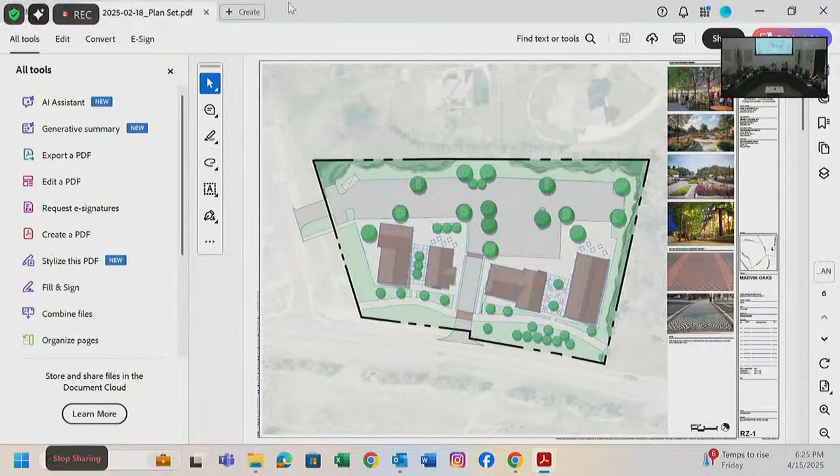Go down. Let's go one more. Stop right there.

The surrounding land use and existing zoning include: to the north, residential and common open space for the Preserve at Marvin. To the south is Civic and Village Hall. To the east is residential, zoned R40 Union County, the Gates at Ansley. To the west is also residential/common open space for the Preserve at Marvin.

The site currently consists of approximately 2.939 acres with an existing single-family home and detached accessory structure. The applicant is proposing to demolish the existing structures on the property and construct 4 new commercial buildings totaling 30,000 square feet of commercial retail space.

The proposed development will be phased, with buildings 1 and 2, the two buildings on the left closest to Village Hall, being constructed first, and buildings 3 and 4 built during phase 2. It's anticipated the development will not exceed 7 years to be fully built out.

The total building sizes: on the left is 8,000 square feet. Buildings 1, 2, and 3 are 2 stories. Building 1 has a 4,000 square foot footprint, 2 stories, totaling 8,000 square feet.

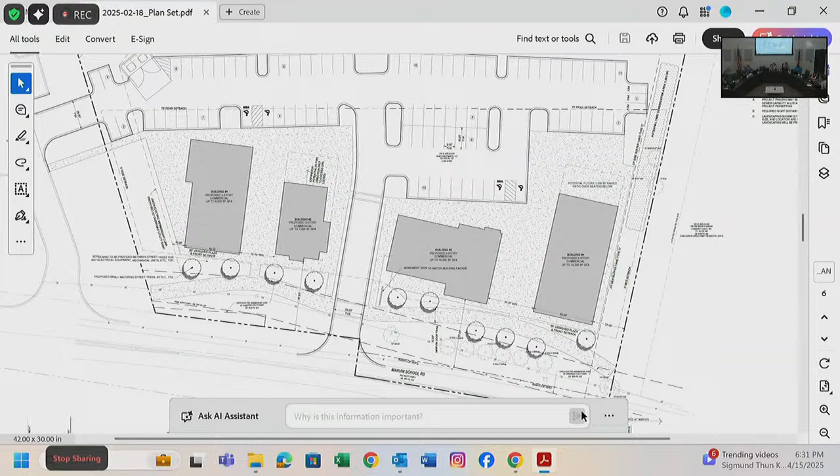This is once again a portion of the Marvin Loop, which the village has received funding for and is currently going through the engineering process for that project. So the applicant, if approved, has the option to either construct that portion of the trail per the approved Marvin Loop plans that get approved by NCDOT for construction, and or pay a fee in lieu for the portion of the material, the linear footage of the asphalt.

And the location of that is approximate. Once again, the applicant is working with Dewberry, the contracted engineer with the village for the Marvin Loop project, to get the alignment surveyed and straight, basically set in stone based off of what Dewberry is doing for the overall loop extension plans. Any questions on that? Does that make sense?

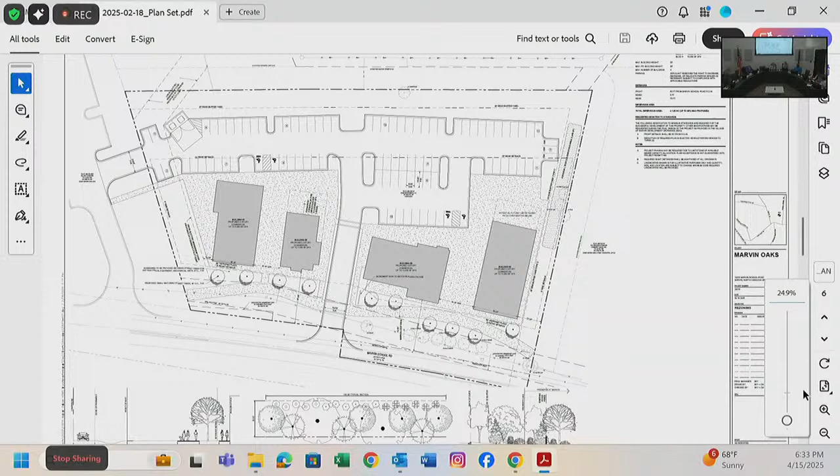Parking, once again, the Heritage District, as we have discussed in previous rezonings as well as with this one, there are no minimum parking requirements. That's how the district was set up. The development is proposing 92 parking spots, including 4 ADA and 3 electric charging station spots. That 3 is a deviation requested. The MDO, when we adopted it, required 1 PEV charging station for every 10 parking spots. So that is something that can be discussed. It was recommended to be 3, just so there is still available parking for the rest of the development, as well as it being the first development under the MDO with that new requirement.

The site also connects with Village Hall, which, depending on approval and the uses, would have different times of use. Village Hall has approximately 30 parking spots, so it's ultimately supposed to be shared parking, walkable and shared throughout the district. That does open up additional parking opportunity depending on off hours from Village Hall, as well as when no meetings or anything are going on here.

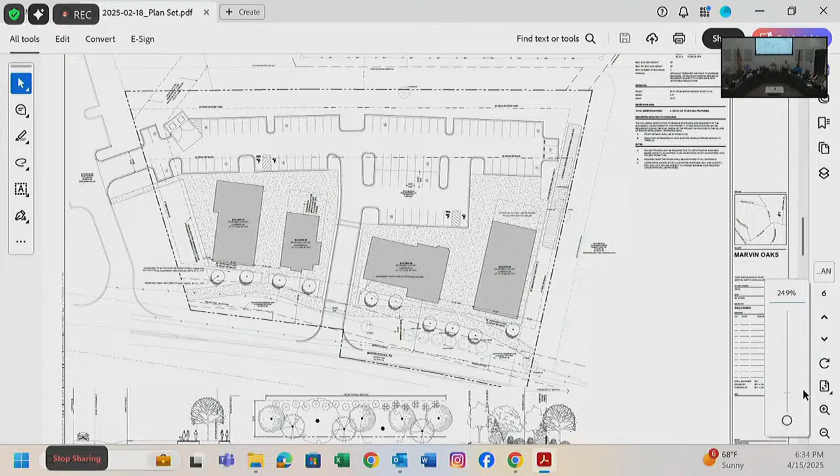Regarding utility with water and sewer, water is accessible from the front of the property. There's existing water along Marvin School Road. There is an existing platted easement at the rear of the property for sewer, so the applicant would have to extend the sewer to the back of his property line. All those plans would have to be reviewed and approved with Union County Water, but this is their conceptual sketch for water and sewer extension.

So these are the proposed elevations for the building. Once again, the elevations are tied with this rezoning. The applicant originally proposed different elevations that you guys first saw at the first planning board meeting in February. Based off comments and feedback received from the neighborhood meeting and the initial planning board meeting, the applicant then revised to these current elevations, which are kind of consistent with the design of Village Hall, as well as the color scheme and material.

Other than that, that's the high-level overview of the staff report. Once again, the applicant is in the process of completing a TIA. All that information will be provided to you guys at the next meeting, including, we had a meeting with DOT last week, regarding road improvements for driveway access. Conceptually, what was discussed with DOT is that there would be a left turn lane coming into the development. The exit of the current development would be right-out only, and Village Hall would then become right-in, right-out only as well. So if you're trying to make a left into Village Hall, if this development's approved, you would turn left into this development and connect in.

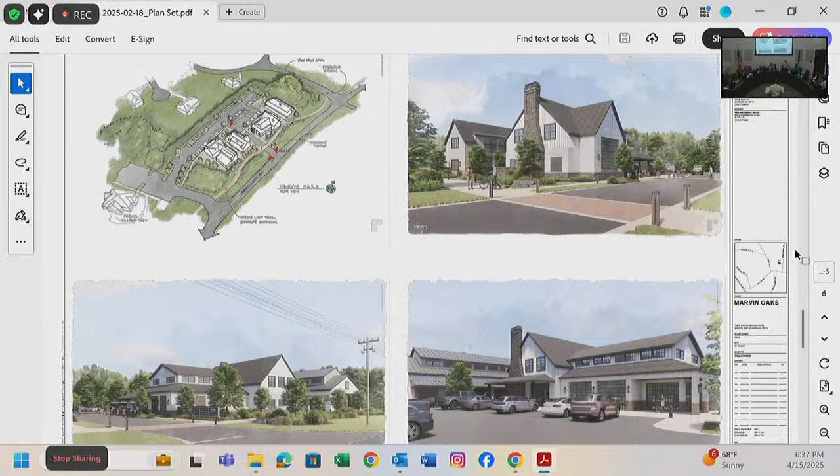Ravi, do you want to speak regarding the stormwater aspect of that? I know his engineers have already started preliminary design. Why is he coming up again? Once the rezoning is approved, the applicant would then move into their construction document phase, which requires a stormwater study to comply with our ordinance, reviewed by the village as well as NCDEQ for permitting. It's not required as part of the rezoning phase, but the applicant has already done initial design and discussions with his team, so I'll let him talk about that.

We already have our engineers working on it, don't get too technical. The only thing we're still waiting on is the TIA, which was dependent on what DOT's requirements and improvements for the property were. We got that list and we're trying to incorporate that into the TIA and into the plans too.

And I know parking was a concern brought up before. We actually lowered one of the buildings from 10,000 square foot to 5,000, from 2-story to 1-story. That added us another parking allowance for the 5,000. That should give us a little over 3 parking spaces per 1,000 square foot - roughly 3.6, because it's only per 1,000 square feet now.

Are there any updates on the sheriff's department potentially having space in there? We did have that discussion. I think our attorney and the town's attorney are actually talking about that. They have an informal discussion going on and some documents they're reviewing. So that's still in process.

Okay, can I add - our engineers looked at the stormwater. Once again, because it's the rezoning, the stormwater - if this rezoning is approved and they moved into the construction document phase, yes, the village would be reviewing those for compliance with our ordinance.

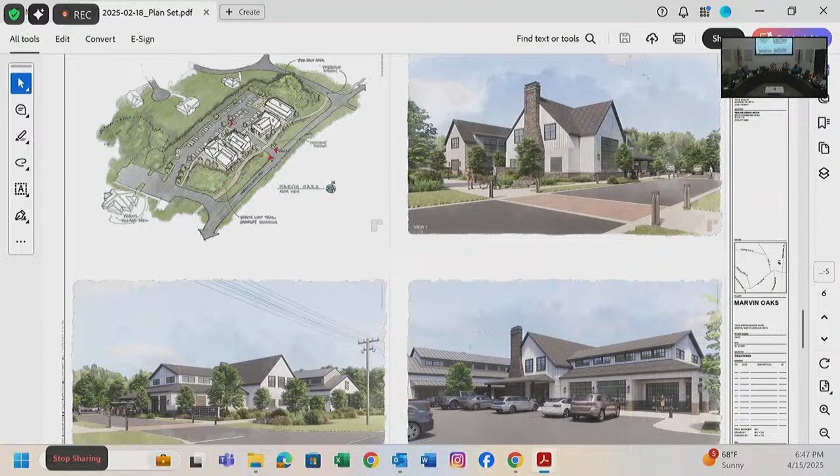What is the slope of that back property line, the top? Sorry, I'm trying to find it in the documents. Go to the existing conditions. I think there's roughly 5 to 8 feet of fall. What page, where, 20?

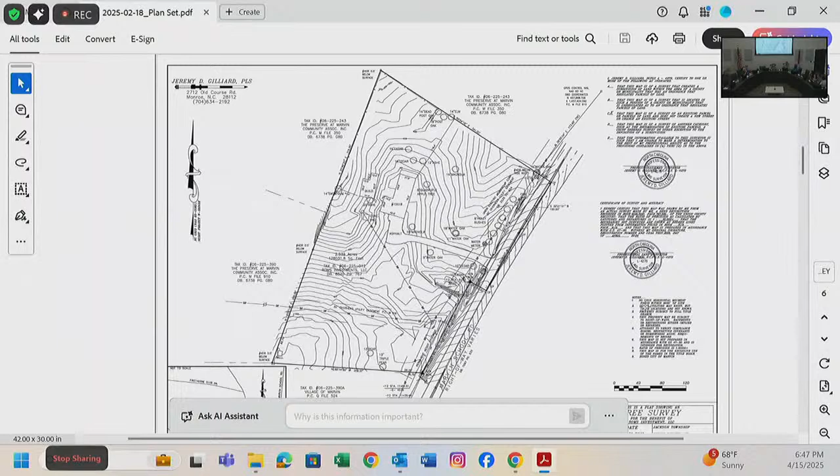Yeah, but those are topo lines. Scroll into the elevation. Oh, yeah. I broke it. Give me one sec, I'll just look right here. There's, like I said, about, you can go out there and look now, there's roughly 8 to 10 feet of fall currently.

Once again, this is existing conditions. When they get into their grading, the site would still be graded to capture all stormwater falling on the site. It would be retained with their proposed underground system and then discharged. Our stormwater ordinance states that whatever the pre-existing drainage patterns would be, the post-development has to meet, if not be better than, that. Wherever the water's currently falling off the site, which I think is at the front right of the property off of Marvin School Road, and the back left, or maybe it's the other way around, front left and back right - all that would then be part of their stormwater design.

Questions before we move on?

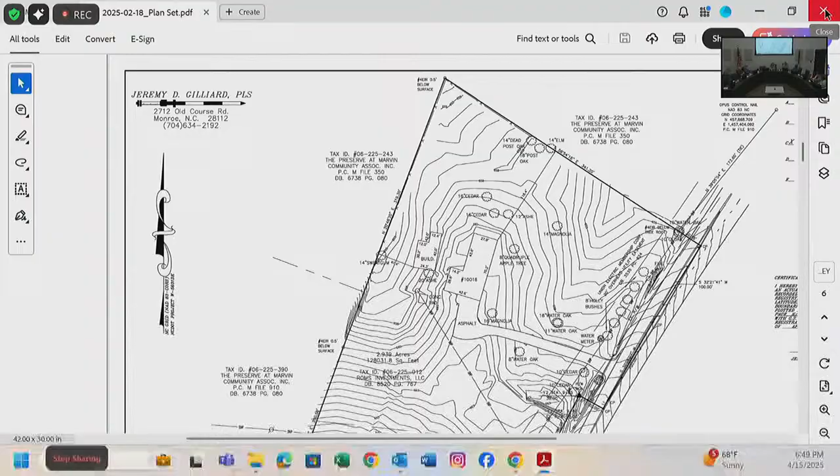It does have a laser pointer, by the way. Click it and see if it works.

Good evening, my name is Lisa Thompson. I'm a land use consultant with Moore & Van Allen. With my previous experience as a planner over the last 18 years in municipalities throughout Union County, including Marvin, it is good to be back. I'm excited to be here.

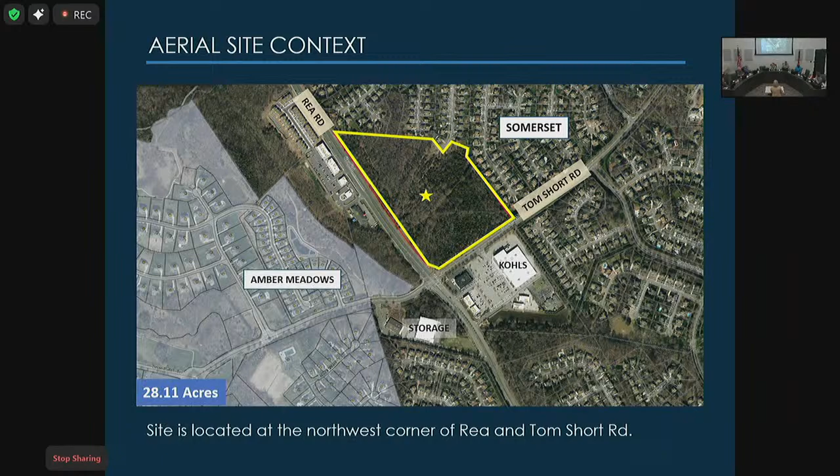To orient you to the site, the subject site is outlined in yellow. It's at Rea Road and Tom Short Road. You have the Somerset subdivision to the north, and the existing Marvin limits in purple, with Amber Meadows being the closest subdivision to the subject site. It's 28.11 acres. Currently the property is in Union County, zoned B2 PUD6, similar to a conditional zoning. It is approved for 275,000 square feet of commercial.

We, again, are looking to annex into Marvin and rezone that to MU2.

In the next two slides, we'll show you the flexibility that we're seeking. But for each development area, there's a list of development standards. Devil's in the details—this is where your uses, your setbacks, your architectural standards, your stormwater, all the technical details for each development area are going to be in those development standards.

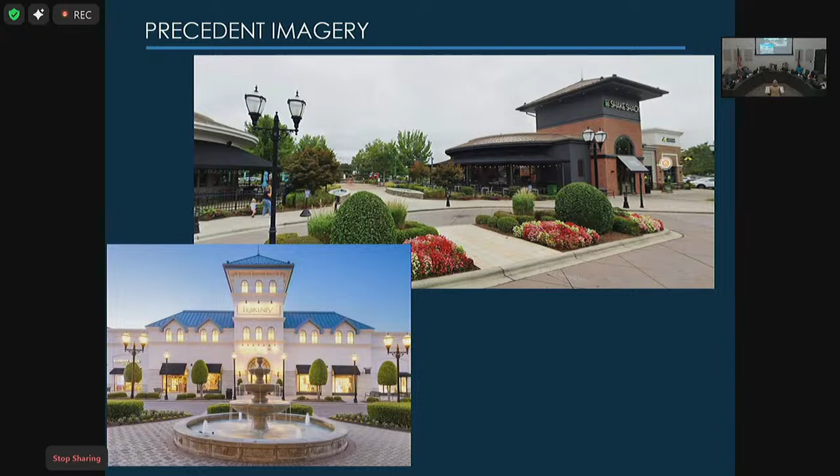Here's some conceptual renderings for the commercial side, again with varying roof lines, different materials, canopies, and that pedestrian feel throughout. We also provided precedent imagery to show the fountains, open space, and character we're looking to provide, that residential feel with the roof line, the canopy, the open space. This is Robinson Farms, showing the residential feel, varying materials, space for children to play, and a more conceptual image of the lifestyle and character we're trying to build with this project.

Again, this is an updated plan from what's approved in the county. We have residential adjacent to residential, which will help self-police some of the commercial back-of-shop uses. We have overall decreased intensity of development and a reduction in commercial square footage. Instead of a regional shopping center, it's more of a neighborhood type shopping center, with lower traffic generation.

We held our community meeting on March 31st and got great feedback. We're hoping to get feedback from you all too, and looking for a recommendation in May. We're happy to meet with any residents here tonight, or with you all, if you have questions—maybe reach out through Hunter. Again, the devil's in the details, all the architectural requirements and uses are listed in those development standards. Take a close look at those and we'd be happy to answer any questions.

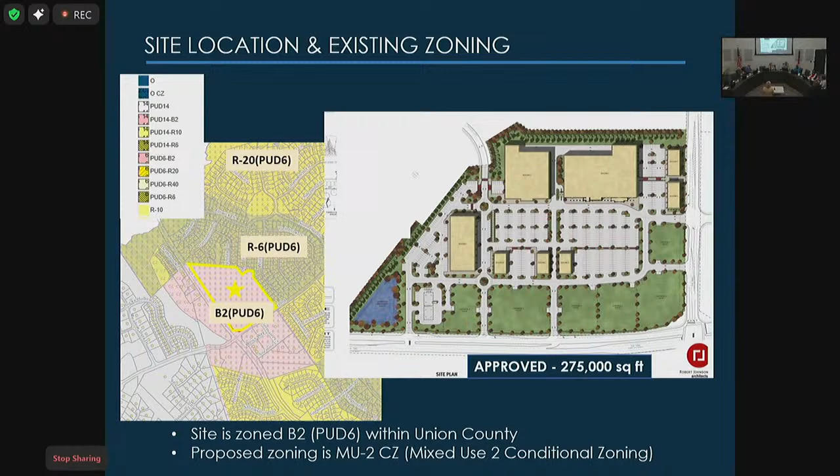One of those conditions of that special use permit approved through the county would be that the applicant/developer provide that vehicular access if the residents of Somerset want it. As they mentioned, based off the neighborhood meeting discussion, it does not seem like they want it. So in short, some of those conditions from their existing plan would probably be incorporated in, but that would be one, once again, if the residents of Somerset don't want it, it's not anything that I think from a staff level we're going to be requiring.

I'm just glad the conversations have happened, so. I'm just curious, have you guys done some type of impact analysis to the school system here or spoken to the school?

Yes, so we hired an independent consultant to run a school impact study. This is a consultant who doesn't live in the area, they're two states away, so they're not part of this discussion as far as the local picture. What they do is use a decennial census of the population and number of homes feeding Rea View Elementary School, Marvin Ridge Middle, and Marvin Ridge High School. They also use 2023 census data looking at the next 5 years, taking the average price point of the homes being proposed and the population of students per household feeding those schools. At this time, they came back and said the preschool would have about 4 added students, the elementary school another 4 added students, 2 students to the middle school, and 3 to the high school.

And then we're going to take that report and share that with Union County Public Schools.

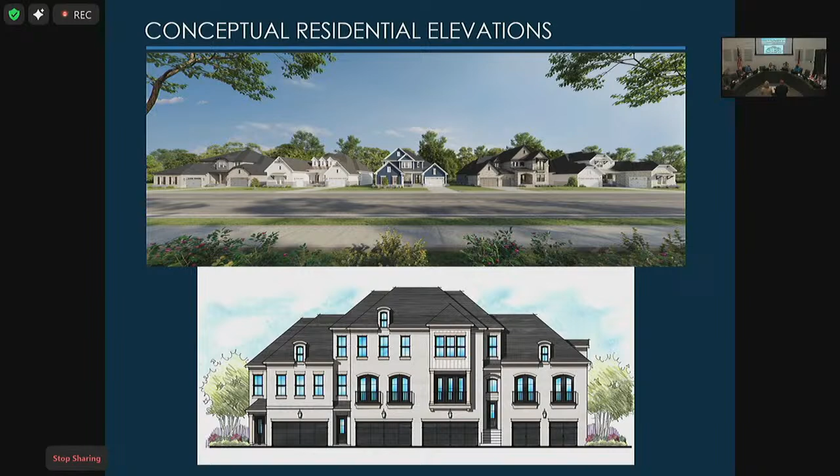Okay, are there any... I saw the sketch of the commercial buildings. I understand the residential, we have a really good sense of what the residential would look like, but in terms of the commercial, the design aspects of the commercial, it's just hard to tell what that would look like — it could be beautiful, but...

We'd like to see materials. So basically, what we'd be looking at is variation of materials, variation of parapet heights, variation of roof planes and roof types. I think we'd be using a good amount of masonry.

Basically what we're trying to avoid is any blank facades. We're trying to make the buildings very interesting in appearance — lots of glazing, lots of glass, canopies, just a lot of interest and activity along the facades. So these are just some rough sketches of the style we're trying to aim for, basically.

You'd have some single story buildings with faux second story elements, and some two-story buildings. So I think there'd be quite a bit of variation between the different buildings on the commercial side of things.

I just wanted to make one point about the two-story versus one-story — this came up in the community meeting. Of that 165,000 square feet, that includes second story space. So we don't know what the footprints of each building are going to be yet, but it's not 165,000 and then we could put another 165,000 on top — it's not a 165,000 footprint. That's good to know, thank you.

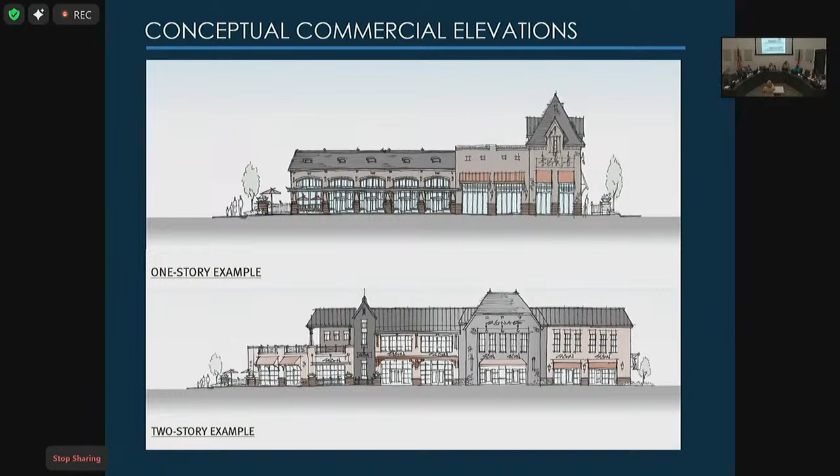Okay, great, thank you.

If any resident is here from the Somerset subdivision and would like more information on this project, you can visit our website at marvinnc.gov, and if you have questions on how to find it from there, you can find me at the end of the meeting. Thank you all.

So, once again, before we move on, this is the preliminary introduction. Staff will have our report, as well as the more detailed rezoning packet, for you guys to consider at the next meeting. There have already been discussions based off some of the feedback received at the neighborhood meeting, and staff has provided that feedback to the applicant, who is working on incorporating some of the conditions. So all that will be packaged together for your consideration at the next meeting.

Perform the function of design review board to review the plans for the Whataburger project located at Marvin Gardens, out parcel 3.

This is something you guys have not done in a long time. I didn't even know Whataburger was in North Carolina.

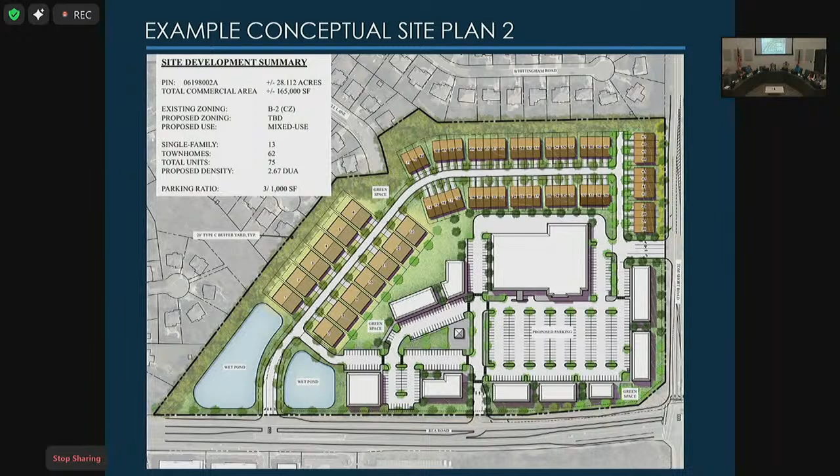That design review board process was part of the old ordinance, which I included a reference to in your packages, as well as the Marvin Gardens ICD development standards. So this is the first introduction type thing. This is what was submitted. I will say the applicant went thoroughly through the Marvin Gardens ICD language.

I know there may be some comments or questions regarding the aesthetics of the building. The main thing I want DRB to focus on is the aesthetics of the building, the landscape, and overall site design, because the rest falls into zoning or engineering compliance, which has been sent to our engineer for review. Overall, out parcel 3's grading and infrastructure was outside of the parking, and was initially graded as part of the original site development.

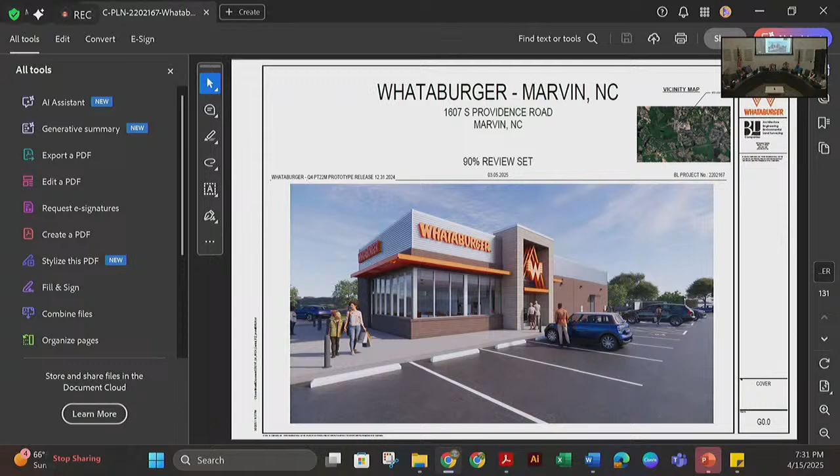So when you go, is this the DRB set, or is this the full set? Yeah, I've reduced it. I just want to get the site plan, and we'll go through it.

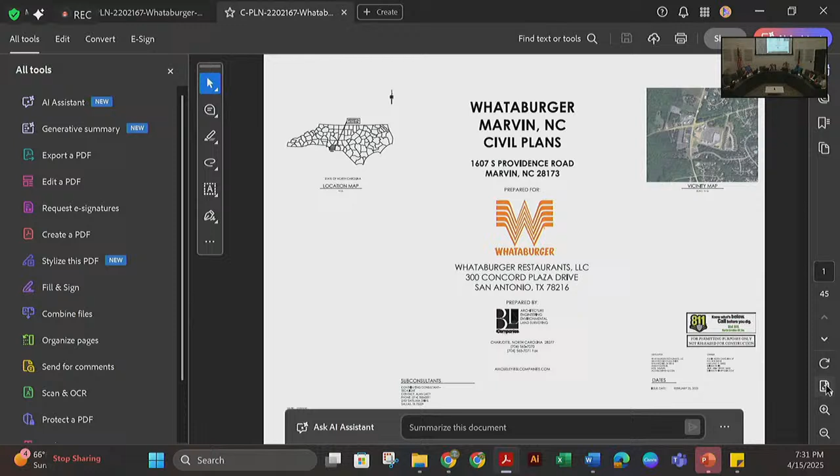My goal tonight, because the applicant's design firm is not here nor online, is to get any initial comments and questions from the board. If you guys feel comfortable and think it aligns with the architectural standards for Marvin Gardens, then you, as DRB, can make that motion to approve. Once again, the way DRB works is that planning board acts as DRB. You guys are the approval and denial authority. It just goes to council and they affirm whatever decision you make.

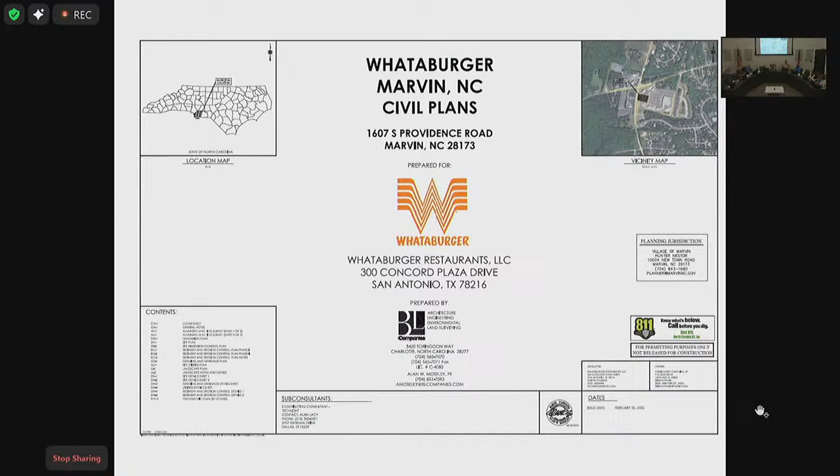High level, use-wise, the use for a drive-through and fast food restaurant is a permitted use on this out parcel. The overall site with parking and the way it's laid out does comply with the regulations in the Marvin Gardens ICD. There are a few minor things regarding the drive aisle that need to be addressed by the applicant.

On the site plan, you can see the little white hatching is the drive-through lane, but it is a double drive-through, and per the Marvin Gardens ICD requirements, both drive-through lanes technically have to be a different material, like concrete or something. So they would need to enhance that outer lane you see on your screen to comply with that. The outer lane is the drive aisle lane, kind of like a pass-through lane, which does comply with the minimum standards.

Any questions on the overall site proposal?

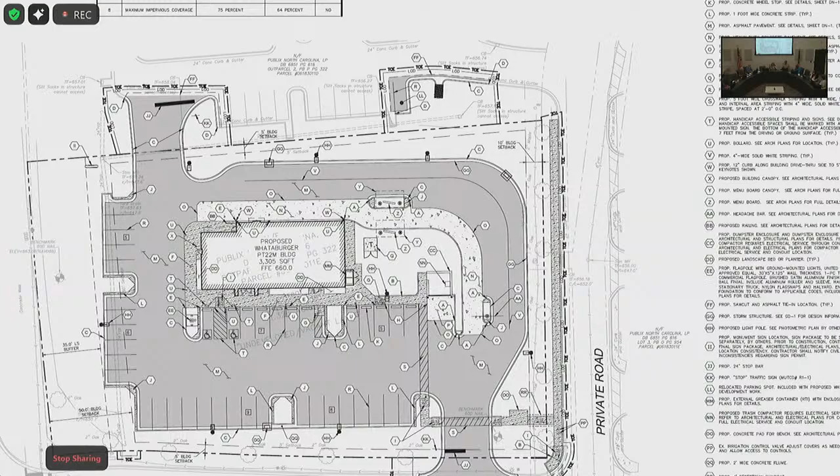Where do you start? Well, start off with, one of my first questions you evidently answered, but you said they received the development standards. It doesn't look like they paid any attention to them to me. In regards to the architectural design?

Well, several things, starting off, and I'm not nitpicking, I actually read the standards, but on page 10 it said parking stalls may not be placed between the building and a public right-of-way. Well, so that is true, and then there's another section that does allow it.

Once again, it's how ordinances are, it's great, especially when you literally develop a set of ordinance standards from scratch. I mean, the Marvin Gardens, I don't know if anybody on planning board here was a part of that process, but I think it was about a 2-year process. Rich might have been. But that was one of the first things we noticed here in our review. Do you have the?

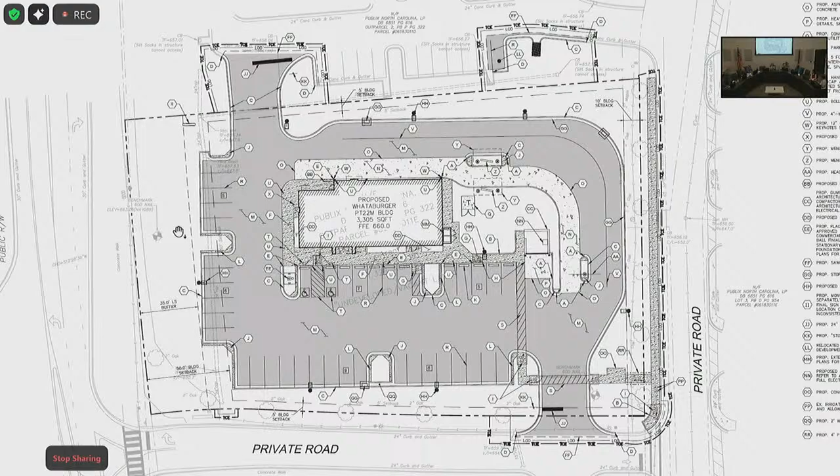There it is. They sent us the full plans, 131 pages, so I tried to take out the significant ones and put this together. But as you can see here, they do have detailed landscape and plantings being proposed along the parking lot in Providence. So therefore, it would allow for parking stalls to be along that.

The other thing to note is that screening for drive-through lanes is also required. You can see in the center at the top, they are putting additional screening there to basically screen the drive-through from out parcel 2, which is where Dunkin' Donuts and everything is at.

And then, of course, it speaks to architectural design quite a bit, which looks like standard Whataburger elevations, don't even come close. Architectural was probably the biggest thing during our review that we were kind of like, it doesn't fully line up. It doesn't even come close, I'm sorry. Yeah, it's the brick color, but yeah, 100%.

The things that we noted, and Polmy did a great job in her review of this, is the roof pitches, where in the architectural designs it talks about having varied roof pitches. It's a flat roof.

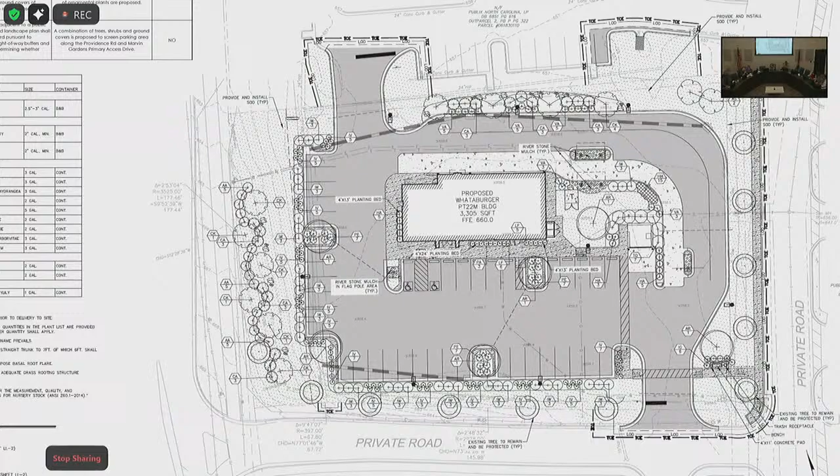Yeah, but I mean, just page, oh Lord, I don't know what page I'm on. Third, I'm on 3rd. It clearly states, vision and architecture, Marvin Gardens will enhance community's connection to homes, to its agrarian and equestrian roots. Acting together, the homes and shops will strengthen the sense that this is a place with a unique history. The character of the buildings draws inspiration from the forms of country barns, small town shops, and classic farmhouses, and brings those forms to the present. There's nothing, not one thing on that Whataburger exterior that says equestrian, agrarian, country barn, none of it.

So slap some shingles on there. I mean, something, you gotta give. I mean, you can't just stick your, then you throw also the same thing all over North Carolina and expect people to say...

Trust me, we already noted that. Bring this on. DRB has to say, so I was waiting for your guys' comments and feedback to be able to share back with the applicant.

Circle that section, yeah, and then you highlight it. Throw in the signage requirements as well.

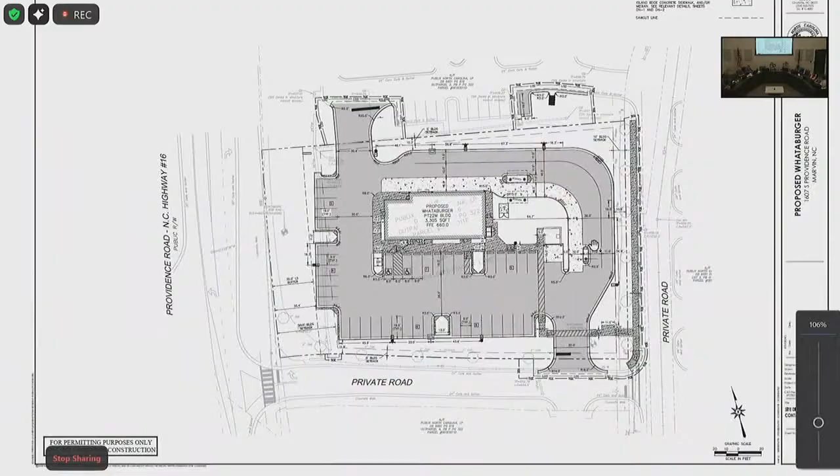So speaking of signage, the elevations have the signage, however it was conveyed to the applicant that they would have to submit their signage plans because there's no, you see them in the elevations, but there's no actual signage plan showing the square footage, the dimensions of the signs.

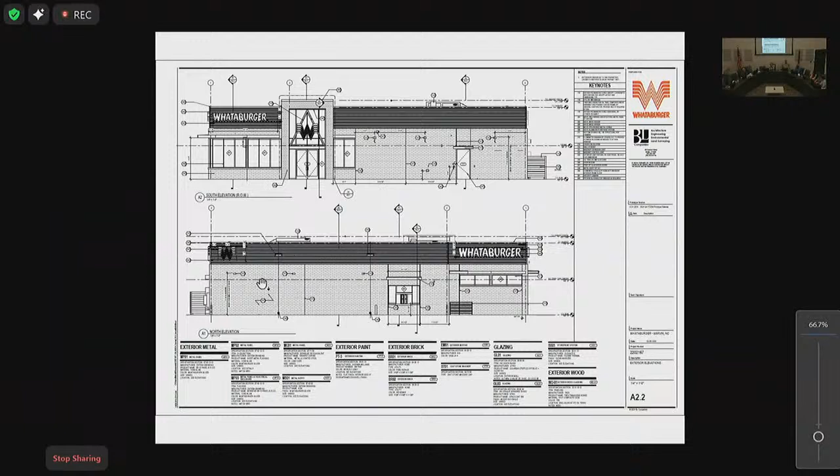Similar to what you guys saw with Dunkin', the most recent one you reviewed about a year and a half, two years ago. So this signage plan would have to come back through the DRB process. It's already been conveyed to the applicant that it's recommended to go ahead and get those signage plans.

The way they are operating is you have Whataburger, then a franchisee, and then one firm doing the construction architectural drawings, and a different firm doing the signage. So it's already been requested, but if it is provided prior to the May meeting, since we're obviously not approving this tonight, it'll be packaged together. If not, you guys can approve it, but you're still going to have to review the signage plan. They're going to have to get that approved by DRB before signs are installed.

How did the other buildings in the existing, how did the other existing buildings get around these issues? Let me finish my question, please.

When I go in that shopping center, it doesn't look like, well, listen to Kelly just read what Marvin Heritage is supposed to look like. That shopping center doesn't look like that at all. I don't think the Publix has those elements to it. That's my question - are we talking about adding cosmetic things to their standard design, or?

So you had the same issue. What I'm saying is you got a Dunkin' Donuts in there now, right? What did they do to their design to get around these issues?

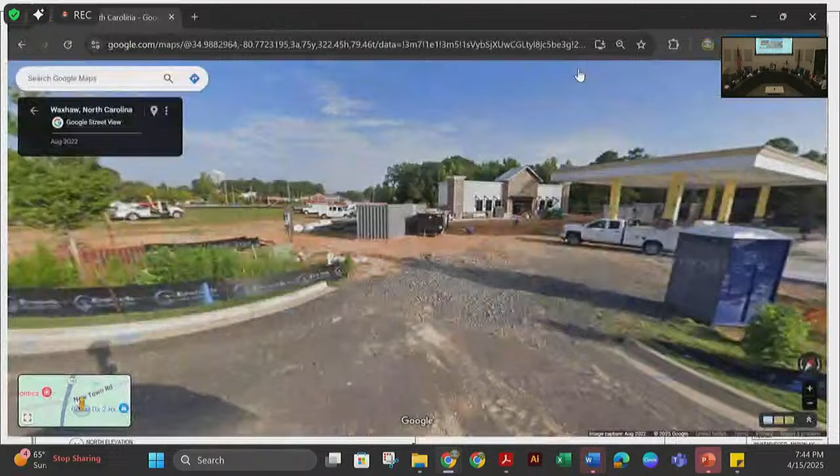Have you asked the applicant to accommodate those designs, or is this our first look? This is your first look. These are all comments that Polemy and I have already gone through and noted, but the DRB process is kind of subjective or opinion. You guys have standards, but everybody can read those in one way, and you're also applying standards based on what's currently there—it's for consistency, that's why it goes through this process. So no, I haven't provided any comments until you give me some direction, so I can incorporate it all and work with them to gain that consistency.

Even the metal work and stuff is different—I totally get you. I don't shop in that shopping center a lot because it's far from my house, but around the pond there are elements of it—they don't look country, they don't look like barns, but there are elements. Even this Whataburger is kind of quasi-modern, quasi-retro 60s, and the metal handrail is just very different than what any of the other structures have.

I've never actually noticed a Whataburger sign in my travels—I don't know if it's usually internally lit. They'll have to come back on that; I know you guys have questions on the signs, we do too, but signage isn't necessarily part of this application. They would have to either submit it so it can all be reviewed at once, or come back and get their specific signage approved separately.

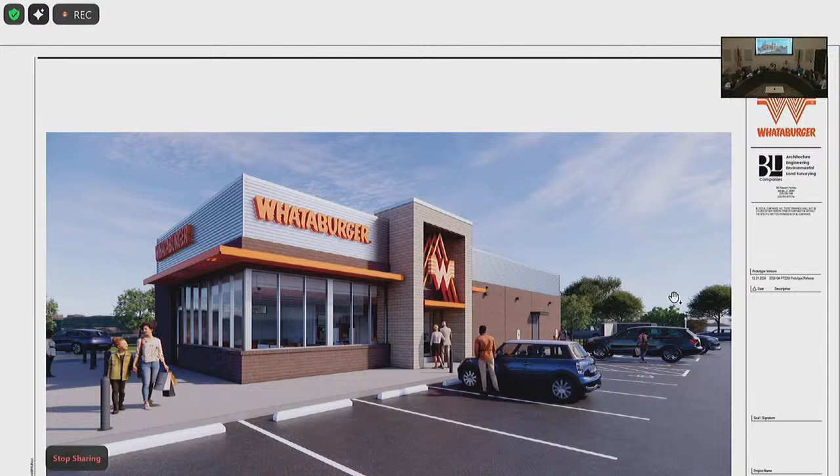It's a fine line because you have zoning standards, but you also have Publix, who owns all the land. Publix still owns the property, it's a lease to build the suite. So they have standards in their CC&Rs that line up with the Marvin Gardens ICD language, but there are still some inconsistencies. A prime example is signage. The ICD language prohibits raceways, but Publix wants raceways because it protects the building asset instead of having the sign mounted straight to the facade.

If a tenant changes and takes the sign off, you end up with fading or something like that, so raceways help protect the building. That's something we're looking at potentially amending in the ICD language, but there are inconsistencies because there's zoning in play, but also a property owner with development standards and requests for their buildings and assets that don't necessarily line up with the zoning.

The cynic in me says Whataburger, a major corporation, just gave us their standard facade, and now they're going to get this feedback rather than meeting us halfway, they'll get credit for all the concessions they make off what they've already done. In a sense, I don't blame them for doing that. If I were their attorney or land use planner, I would too, it's a strategy.

But what Kelly showed me is that the Dunkin' Donuts doesn't look like a standard Dunkin' Donuts either. In my opinion, based on how the language reads and looking at the existing conditions of the buildings already built, you could supplement the brick for Hardie plank, do some type of stone, similar to the 7-Eleven on the corners, or even a hybrid of stone and Hardie plank. I don't really have a recommendation for the top.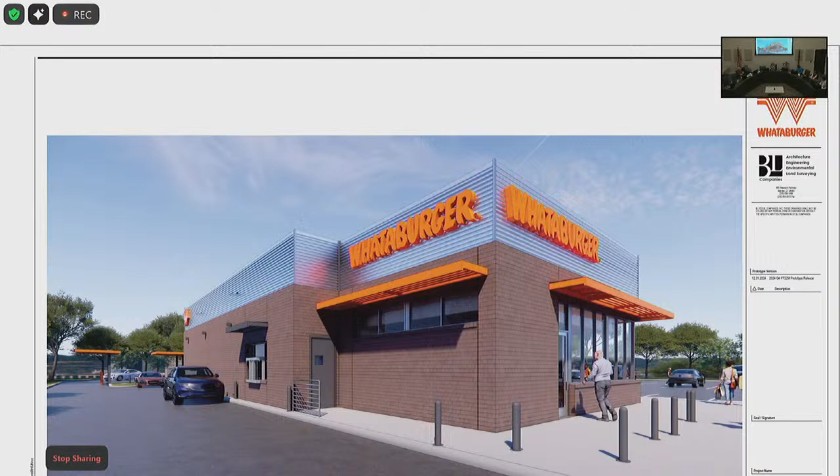The roof line, Dunkin' has somewhat of a flat roof, but it still has elevated roof lines. They've got vertical plank on the exterior walls. If you back away from the commercial area as a whole, except for that one section of Dunkin', all the roof lines are pitched, none are flat. So that would just look very strange.

To be fair, you need to let them know the signage needs the same standard applied, or they're not going to get their standard. 7-Eleven didn't get it, Dunkin' Donuts didn't get it. Even their color schemes aren't going to be exempt.

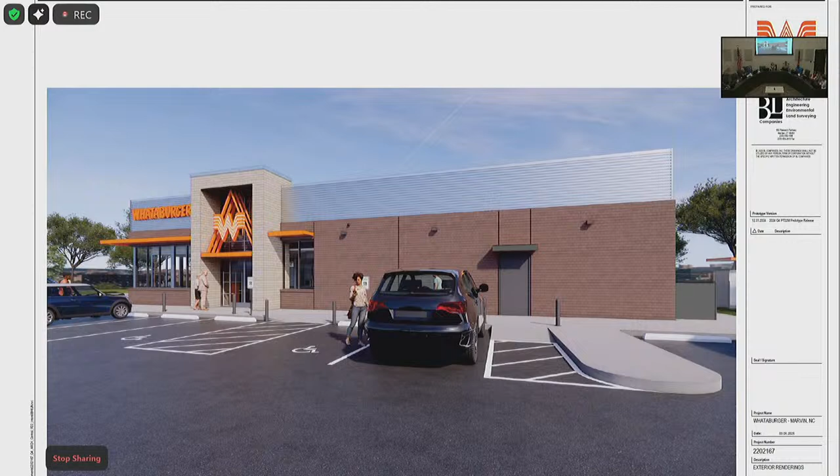On the note of signage, this actually came up with Dunkin' -- there will probably be an amendment proposed to the ICD language regarding signage. A prime example: permitted wall-mounted signs are limited to two for all these developments. That's why Dunkin' has one over the front entrance and one on the side, not one on the rear. It kind of looks dumb, in my opinion, because the way outparcel 2 sits, it has dual visibility from the intersection of Providence and Newtown, as well as coming from Providence heading towards Charlotte.

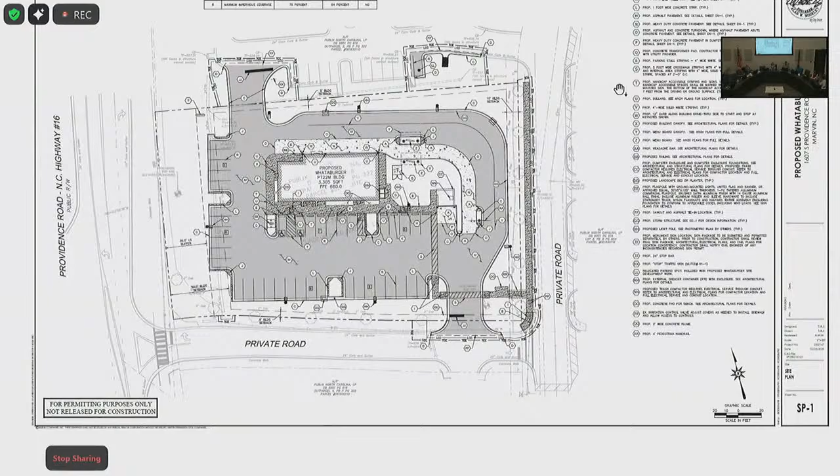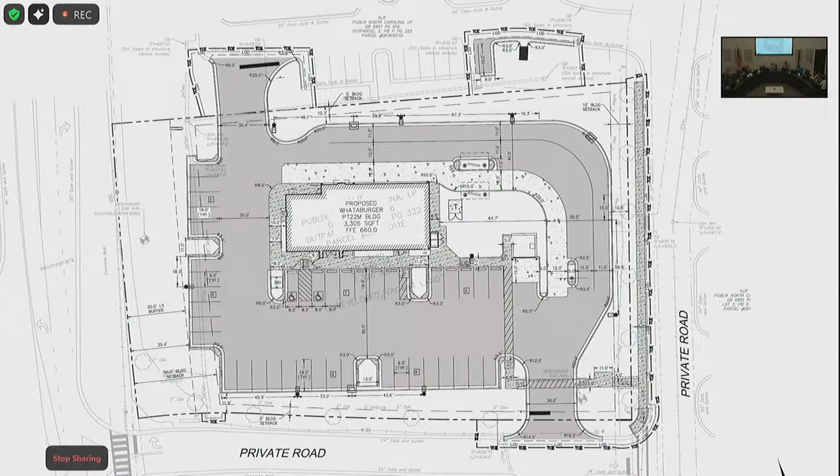Dunkin' has told us people have said it's not the easiest to find, because if you're coming from that intersection you see Yoga 6 but you don't see Dunkin' on the backside. So a text amendment is probably going to be proposed to allow additional wall signage, geared toward situations with double frontage or visibility. Same thing here with the signage proposed in these elevations -- I don't have their signage plans, these could just be standard elevations, but it's not consistent. They have 3 wall-mounted signs that say Whataburger on all 3 frontages, plus architectural signage over the entryway, and another sign on the back side of the building.

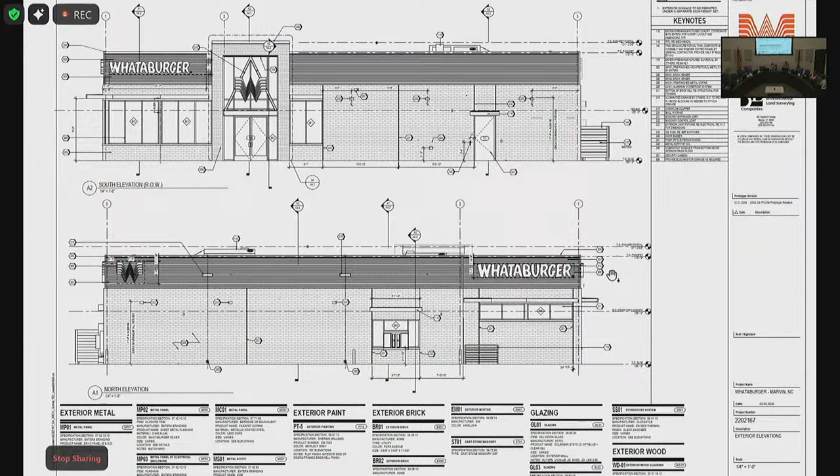So it technically doesn't comply with the signage. Once again, we're not reviewing the signage from this standpoint, but there might be some revisions that need to be made to the ICD for clarification. Not saying it's going to then allow them to get signage like this, but it may be able to expand on that.

A prime example, 7-Eleven. I think this is part of the reason it got delayed, if I recall. 7-Eleven came back and proposed an amendment to the ICD language that allowed that second signage on the back side of the building that has the fuel prices. And if you look in the ICD language, somewhere on that page, the 7-Eleven parcel basically has its own set of rules for signage. So what they did is they came back and amended this and incorporated their signage plan in, just like Publix did at the beginning.

Not saying you guys have to approve it, but that greater detail needed to be compliant with the standards would basically be done through the proposal of a text amendment for the ICD language.

My personal view on signage is that their standard signage is designed for what you see when you get off of a highway off-ramp, and there's 17 fast food stores all trying to get you to turn here. If Whataburger is going to be as popular as I suspect it will be, people will find it. They don't need to see a 50-foot sign above the tree line saying 'here we are.' That's my own two cents. I think they'll figure out a way to get comfortable with signage that's consistent with what's there now.

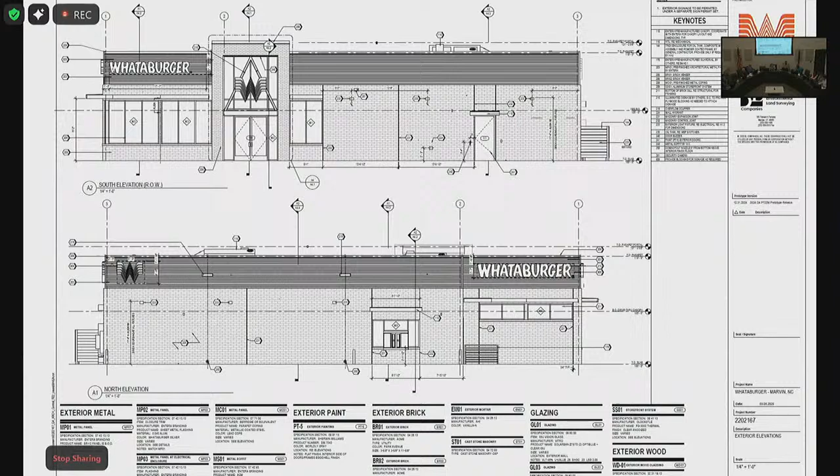I know that this is not design review board, but could you just, I'm trying to understand where the roads are, go to the site plan. It's a little confusing as to exactly where these entrances and exits are dumping into, and it does not look like a good design in terms of, I mean, I can just see people running into each other.

So, double lane, and just for orientation here, to the north where that north drive aisle or connector is at, that is connecting into the parking lot of the Dunkin' Donuts. That little spot where it kind of spurs off up there to the right, like top left, going this way, that's their drive-through lane. So there would be a little connector drive up through or connection between the properties there.

The other access is then there, which is on the private road, entering that little side road at Publix - a little south of this intersection you have the signaled interchange where the Marvin Gardens sign is at.

And then if you're driving north towards Charlotte, you pass this intersection, this little ingress, egress, right in, right out. So that's where their two accesses are off that private road and through the existing side of out parcel 2. So where that hand is, is that where Dunkin' Donuts is? Yes, that's correct.

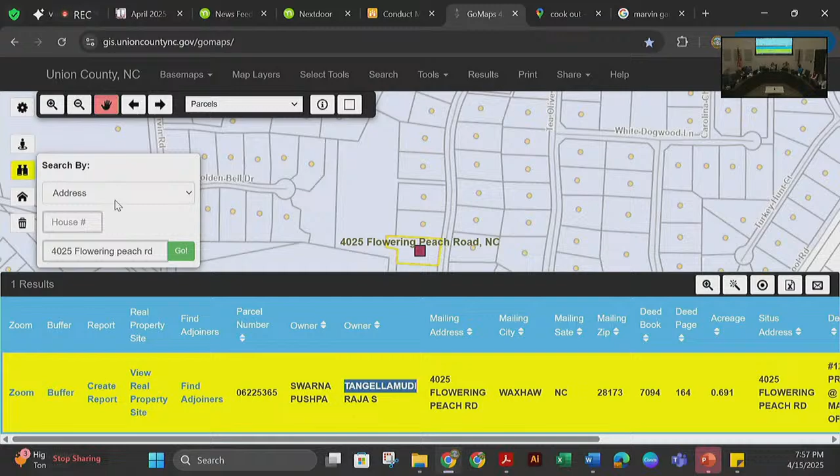Let me pull up GIS. I don't even know how that's gonna work, there's going to have to be some serious right-of-way signage around there, because if you've got two lanes dumping out and people entering, and another commercial property having folks exit, there's just a lot going on right in that little corner.

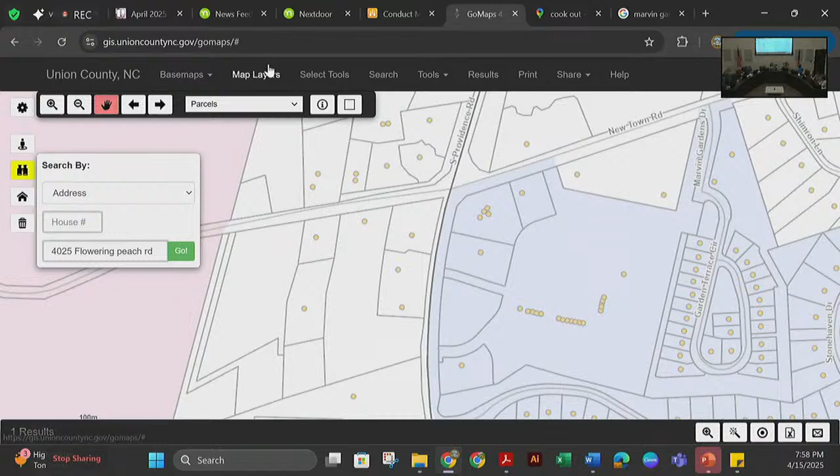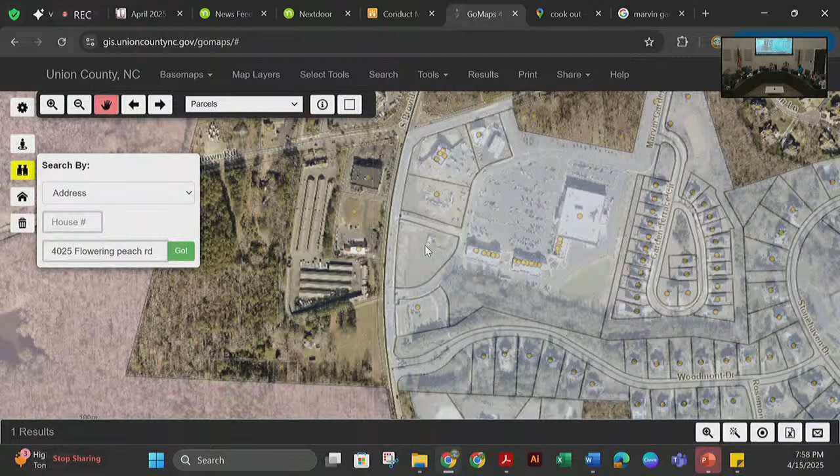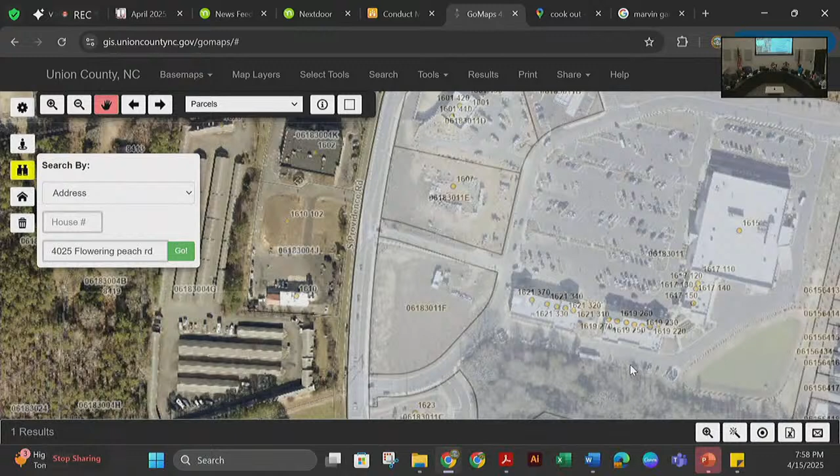That's something that, I know it's not design review board, but it's pretty glaring. We noted that during our review. Let's get a little farther, and then pan up a little bit. So obviously in this aerial from GIS, the Dunkin's not being constructed or completed, but you can see.

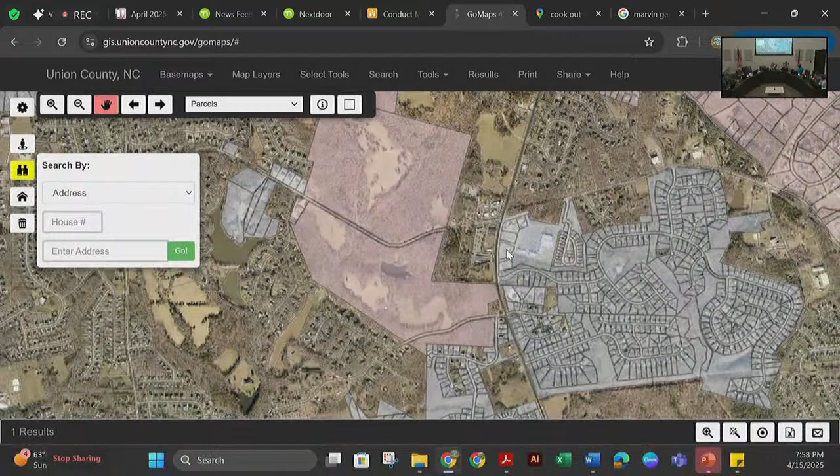I've got it clicked up. If you go to 1600 Providence Road South on Google Maps, and go to street view, you can see very clearly where the Dunkin' drive-through is and how those things would be merging.

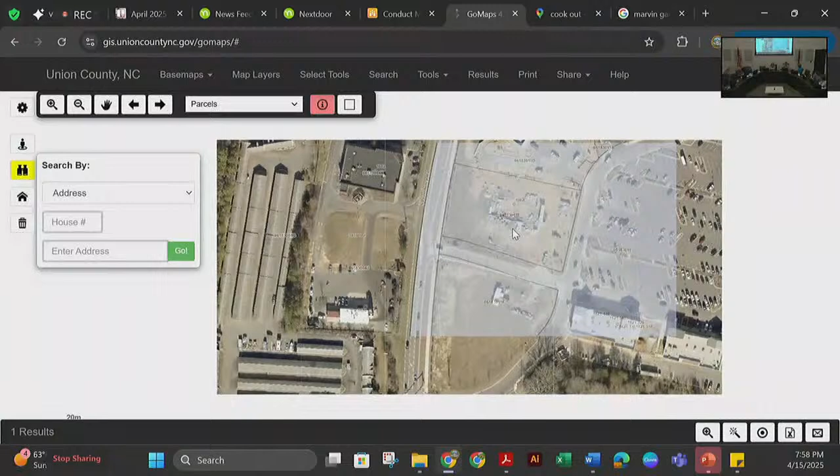You'll be going the exact same direction, so it's like you have to yield to something. That was a note that we made too.

From a design standpoint, I don't think you move the primary access to the main road there, because then you would have, like, Marvin Gardens Drive, the interior road of Marvin Gardens, with the drive access into out parcel 2, and then this road that connects back to Providence.

However, based on what Palomi and I talked about, if you then try to orient the building differently and set up the drive-through, you're kind of messing with where the drive-through starts, which you don't want, because then stacking doesn't work.

So the way it is actually set up probably makes the most sense. Not saying it's perfect. Honestly, I think them being located on out parcel 4 would be better, but once again, not my call.

Out parcel 4 is the one there on the south side. It's just bigger, and I think would provide a little bit better ingress, egress access and site design.

With all that being said, if you orient the building, you're then going to mess with how the drive-through sets up, and that can mess with where the parking is. There's a lot of things, because we looked at that, and there's really no perfect way to do it.

So the way it is designed, this is even something I noted, is like if you think about a Chick-fil-A and how they have the 2 drive-through lanes, when you enter the site, even though their menu boards and their stacking starts right there, it still needs to have some type of, like, you have to go around the building to get into the initial stacking lane. There is sufficient capacity with the double drive-through lane stacking.

That's the thing that's so confusing, because like at Cook Out, you have 2 lanes, and one you have to stop, then you yield the right of way, and then take a left, and they still have issues. Then at Chick-fil-A, everything merges into one, so this is like 2 lanes.

It's 2 lanes, and the left lane doesn't show it merging. Some Chick-fil-A's now, even the newer ones, have actually moved away from the drive-through, and it's like a drive door, and their staff comes out with your food. So it's showing a drive-through window.

It would have to have some type of merging capability. That's once again a note that we've already made, from when you order to then merge over into the drive-through lane. That's the other thing too, if you're merging — think about it, because right where the hand's at, where the mouse is at, go back, that's where you're ordering.

So it is kind of close to the window. There's sufficient stacking for the actual drive-through to comply when you enter the drive-through lanes, but from where you order to where you get the food is not a very large distance. That's one thing we've noted, potentially looking at moving the ordering menu boards back a little bit to create more adequate stacking and merging of the lanes.

But we don't have any jurisdiction over how they manage their flow inside their own parking lot. Kind of. Or do we? You kind of do. I mean, there's standards.

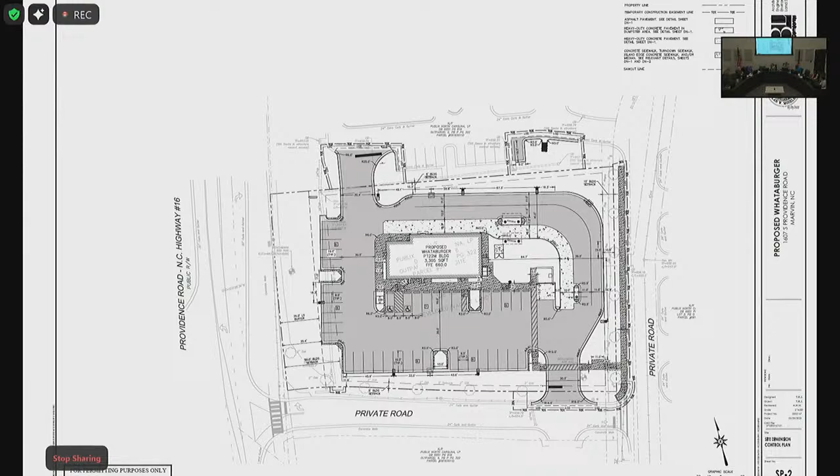See, so if you were to turn the building 45 degrees, with the drive-through technically facing the road, that's technically not permitted per the ordinance, straightforwardly. I think it could be interpreted that it could be, once again, if the screening and everything is there, which they are providing, which may allow for better site flow.

If you then do a full 180 of the building, it still doesn't work, because then you're getting rid of parking and dealing with the same issue. So there's not an ideal answer, I think. I doubt they want a drive-through as the view you see from the main road.

That's not very visual. No, and that's why it's set up the way it is, because that's what the ordinance states, that drive-throughs are not supposed to be in front of a public right-of-way. So would the entrance exit that feeds into the Dunkin' exit, the Dunkin' exit, is that a one-way road right there? Because if not, it is one-way?

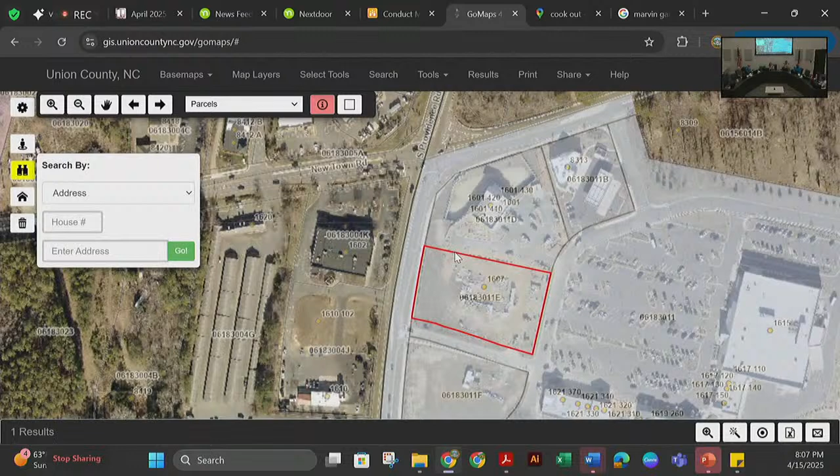So how does it work if you're leaving the Dunkin' exit? Do they have to merge right? No, I think she's talking about the connection from the drive-through. It may be warranted that it becomes entrance only, because then you get into where the stacking technically begins for Dunkin'. That's why I was saying I don't know if that was a current concern.

Pull up the Google Maps. That's just a trouble spot, so they just need a heads up and need to fix it. Or not fix it, but have a plan for it, because if you're coming around Dunkin', you literally sit in your car, go through the drive-through, and as you're leaving you're going down that road toward the internal road. And if you've got another car coming at you, or two lanes going in the same direction, that's a problem.

You see, you have full access here. The problem is if you were making a left turn into the site - this is the proposed site for the Whataburger, the vacant parcel here - this becomes the stacking in the order, the drive-through for Dunkin'. And then the people in the right lane taking a left-hand turn into Whataburger would need to yield to the people coming out of Dunkin'.

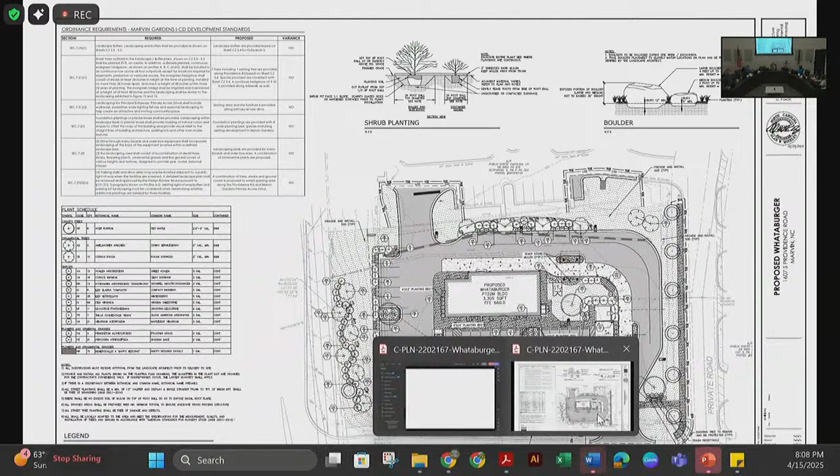Yeah, but again, more signage, like if you don't know that's happening, it just is a problem area, so they just need to be aware of it so they can solve it. You may be able to - I'm trying to think if they were to flip the side and have the drive-through here instead.

Because right now Dunkin' doesn't have anyone challenging their lane, right? Because no one's coming to that parcel. So right now all those people are used to just... There's already a connection point there too. So we can discuss that with them.

There is, as you see, when Out Parcel 2 got approved, there was a through connection here and here. The only concern is, once again, if you turn left into here or turning into here and then you're trying to make a left, you got to think about turn movements, and you don't want it to stack up and back up into the actual road of Marvin Gardens Drive.

Well, I do see your point. The drive-through lane for Dunkin' Donuts is going to become problematic for entering. As well as if two lanes are exiting out of the Whataburger, if they both want to go right, can they? Or is the left lane only allowed to turn left? And then how is that internal road network communicated signage-wise?

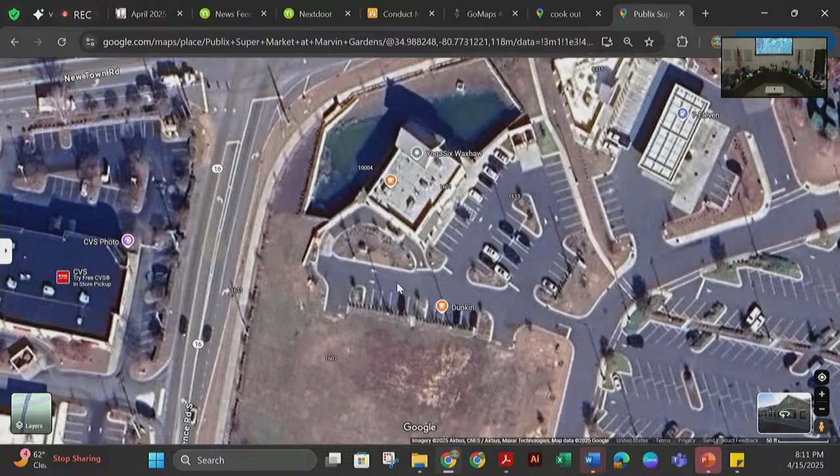We will send these overall. I'm going to send the plantings and stuff to Keith, the urban forester, to get his comments, so hopefully we'll have that for you guys by the next meeting.

Yeah, it doesn't even say what types of plants they are. Right here. Oh, good Lord. You got to look at them. I need a microscope.

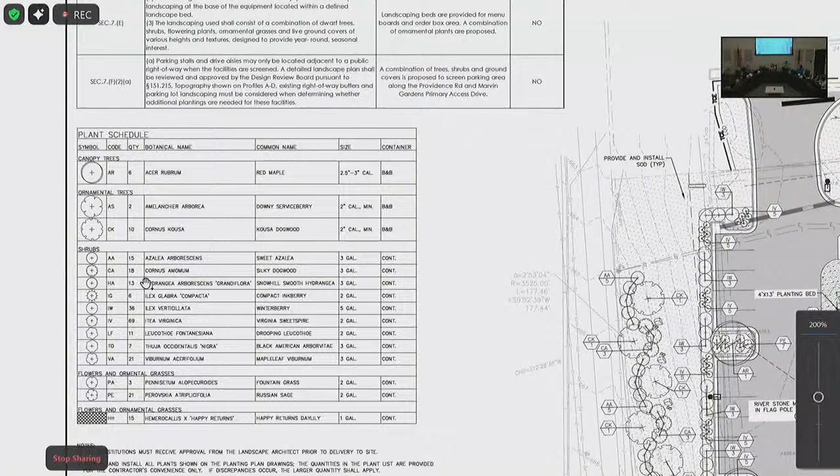I like to get highlighters or pens and color code. Oh my Lord, they're all the same. Some Russian sage, some happy returns. I don't know any of that, so that's fine. See, that's why we have Keith. Coreopsis, happy returns, as long as they're using them.

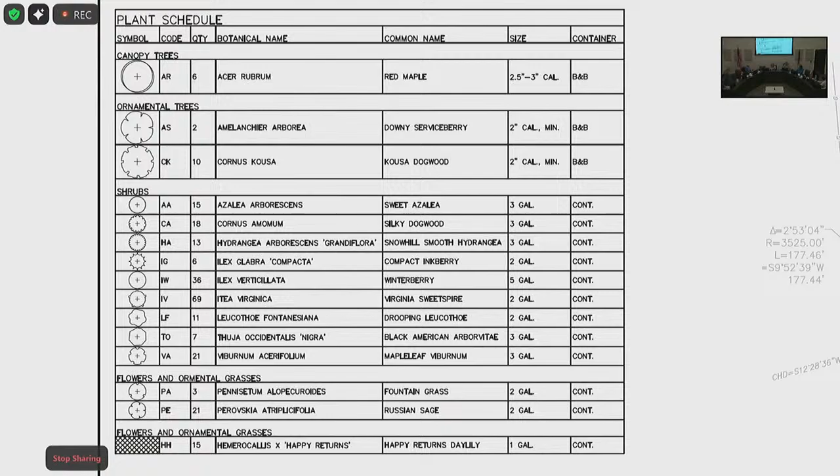So ultimately, too, they have the proposed sidewalk, the pedestrian connectivity with this little hatching. Once again, all outparcels are supposed to install the linear sidewalk across their frontage. They've got that. Once again, the building, the size of the building, the use, and all that complies.

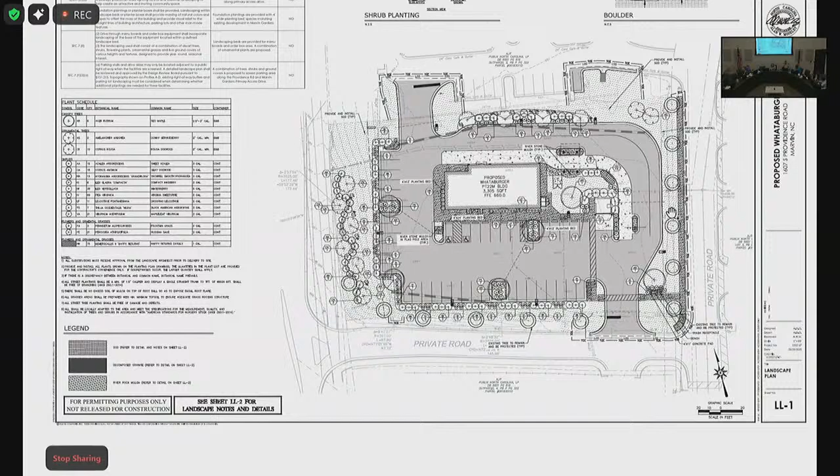The trash facilities are screened. The individual landscaping and the drive-through menu boards are provided. So overall it is consistent and complies with the regulations in the Marvin Gardens LCD, outside of, like I said, the building elevation. So we will get those comments to the applicant and see if we can get some of that amended.

And request one representative from the design team or the applicant to be here at the next meeting. Okay, cool.

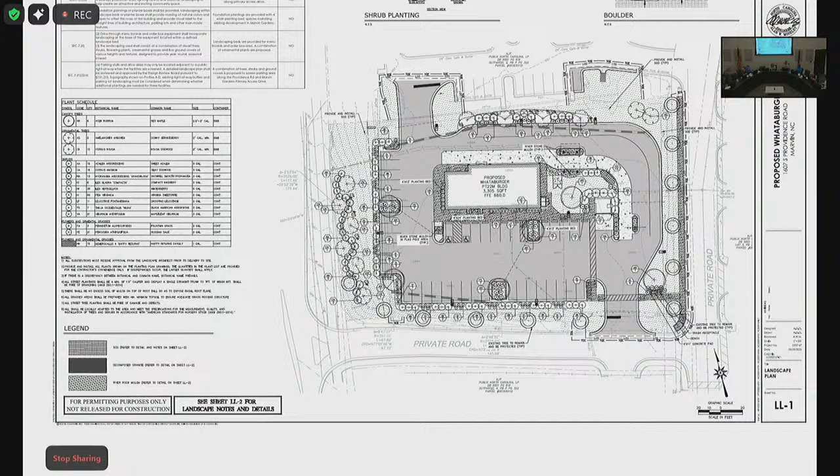All right, I think that is your planner report. Do you have one? This was a lot tonight.

So just a few items. One, if you were there, I know Kelly, thank you for coming last Monday, we did have a development and zoning 101 course. That's why you guys received an email.

In short, it was something that the village, we asked Centralina to come and basically do a high-level overview of planning and zoning and how it relates to Marvin specifically, and how, you know, the stuff that you guys heard during the MDO process, consistent with state statutes, property owners' rights, the procedures that go through development approvals, if it's administrative, legislative, quasi-judicial, all that.

It was a really good, clear, simple presentation. I would recommend us all having a copy as a reminder, but it'd also be great, if we have a new planning board member, to use it for their orientation, because I thought it was an excellent presentation.

And that's where I was going with this, is that we recorded it and uploaded the recording on our website, and Austin and Ptolemy went through and basically bookmarked, mostly Austin, bookmarked like the table of contents to an extent. So when we were talking about the rezoning process, you can go straight to the video, and there's some questions in there too. So if you get a chance, go check it out.